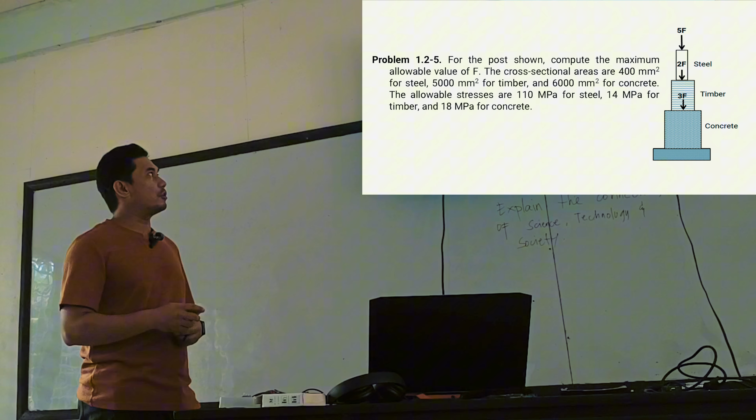For the post shown, compute the maximum allowable value of F. The cross-sectional areas are 400 mm square for steel, 5,000 mm square for timber, and 6,000 mm square for concrete. The allowable stresses are 110 megapascal for steel, 14 MPa for timber, and 18 MPa for concrete.

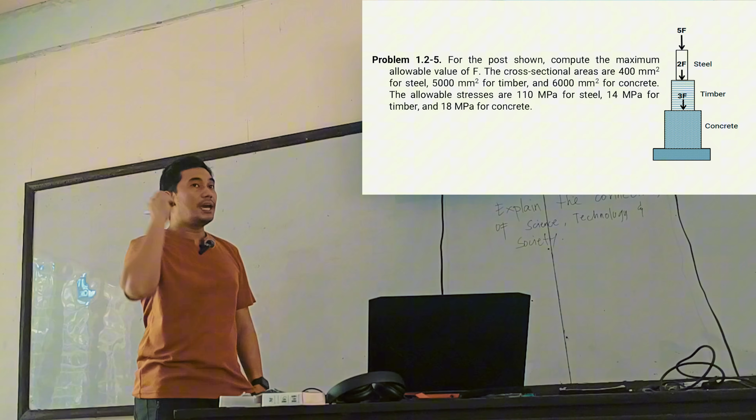We are required to get the allowable value of F. This is similar to the example given, but it's vertically loaded. So we have three materials: concrete, steel, and timber. We're going to cut sections, right?

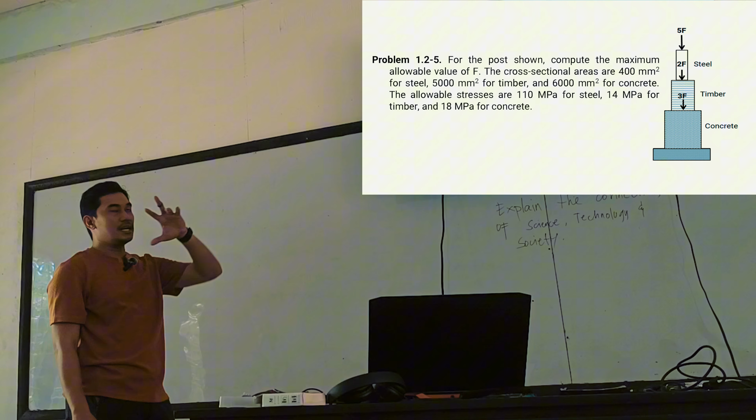That's the technique: the first cutting plane is from the top to the bottom. Even if you analyze the structural loading, the analysis goes from top going down. You don't analyze from bottom going up. It starts from the top and the load accumulates going down.

The first cutting is at the steel side. If this is the cut, this is the steel. So there's a loading on steel: compression of 5F. Therefore we have a reaction at the steel side that is unknown. We need to sum up forces along Y.

Make sure it's Y, not X. Summation equals zero: upward equals downward. So what is upward? The reaction at the steel side equals the downward force, which is 5F. The stress of the steel equals the force applied at the steel side divided by the area of the steel side.

Simple, right? So the stress of the steel is given: 110 megapascal. So 110 equals the force applied at the steel side, that is 5F, divided by the cross-sectional area, 400 mm squared. It's automatically area, not diameter. The answer is clear, right? And that is 8,800 newtons.

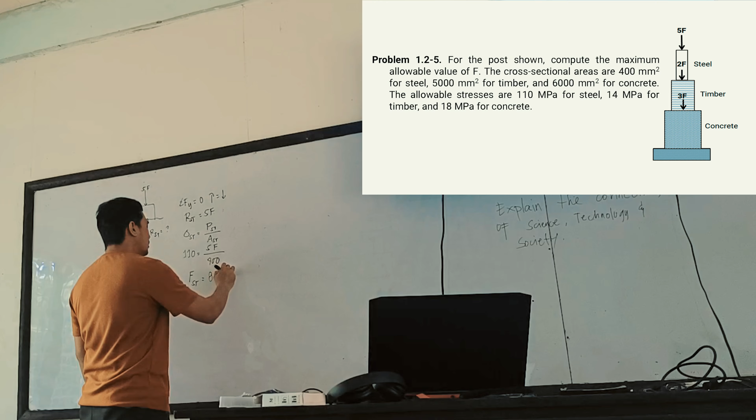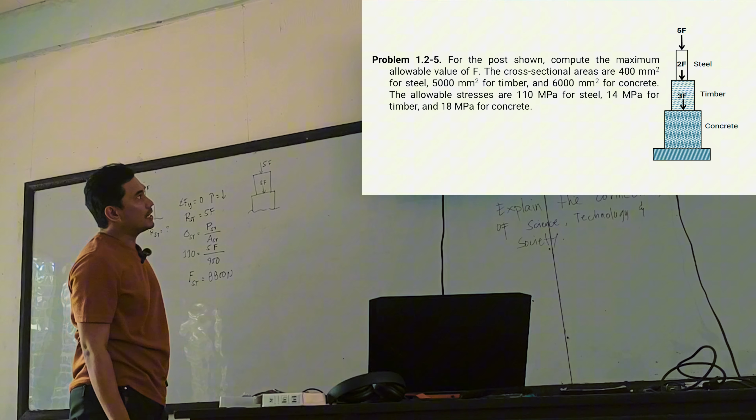This is not yet the final answer because we'll be checking this based on the capacity of timber and concrete too. Now at the second cutting plane, this is now the timber. The steel is loaded with compression of 5F and timber is loaded with compression of 2F at the timber side.

So therefore we have a reaction at the timber side that we don't know. Again, to solve for that, summation of forces vertical equals zero, upward equals downward. What is upward? The reaction at the timber side equals the downward forces, 2F plus 5F. The reaction at the timber side equals 7F.

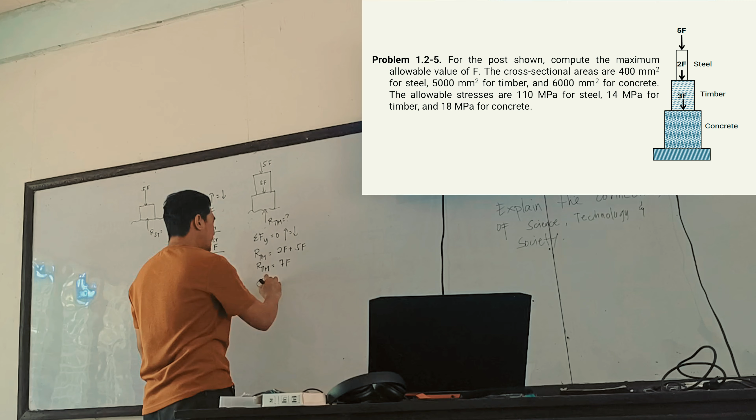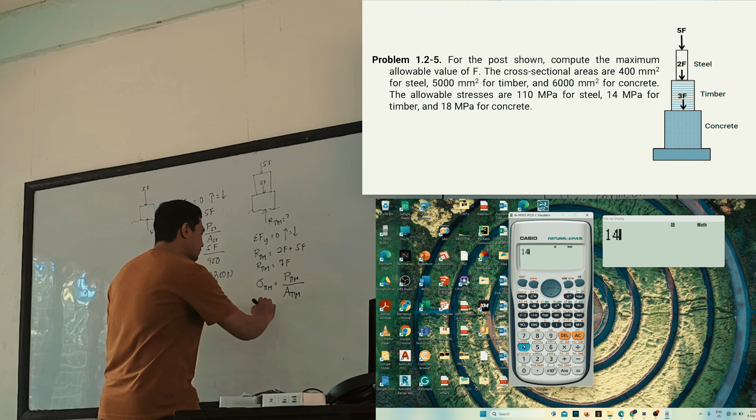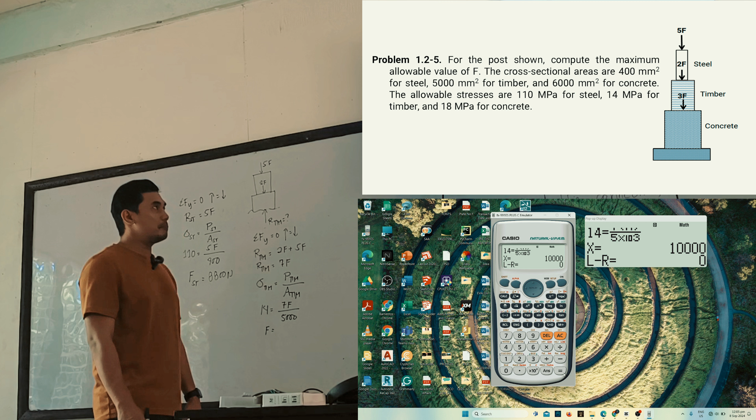So stress at the timber side equals the force applied at the timber divided by the area of the timber. The stress of timber given is 14 MPa. So 14 megapascals equals 7F divided by the area of timber, 5,000 mm squared. So the F value of timber based on its capacity is 10,000 newtons.

The third cutting plane includes concrete, timber, and steel. We have 5F for steel, 2F for timber, and 3F for concrete. And then we have the reaction at the concrete side that we don't know yet.

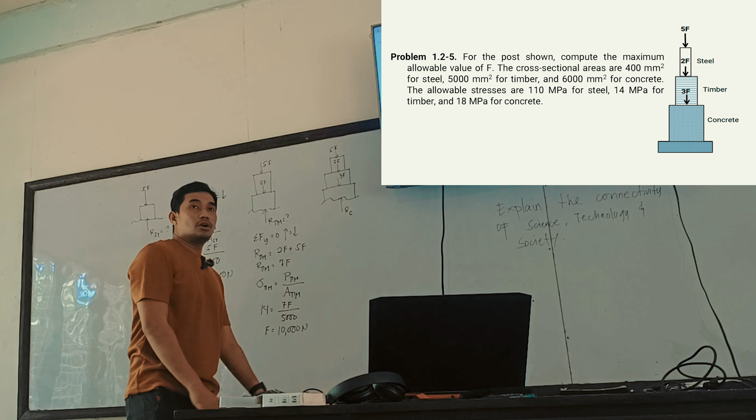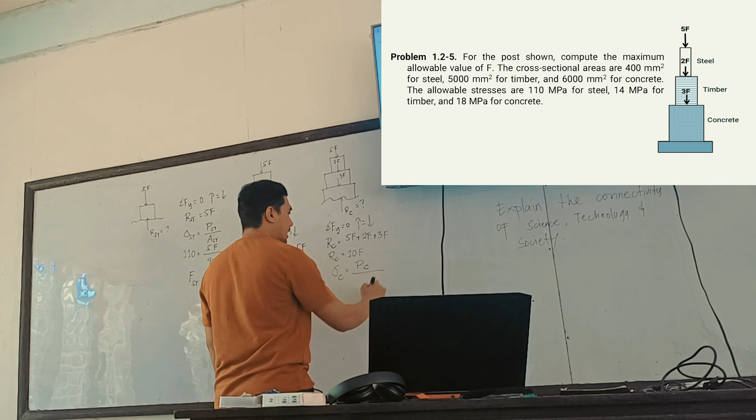To solve for this, again summation of forces vertical equals zero, upward equals downward. Therefore the reaction at the concrete side equals 5F plus 2F plus 3F, which is 10F. The stress for concrete equals the force applied at the concrete side divided by the area of concrete: 18 megapascals equals 10F divided by 6,000 mm squared. F equals 10,800 newtons.

The question asks: what is the maximum capacity allowable of F that can be carried by the three materials? So to solve that, we compute using the formula.

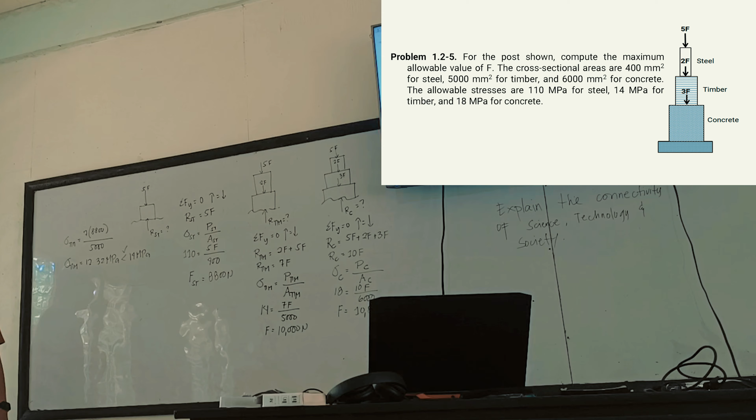Therefore it's okay, it checks out. Next, let's go to the capacity of concrete. The capacity of concrete is 10 times the value of F. So that's 10 times 8,800 divided by the area of 6,000.

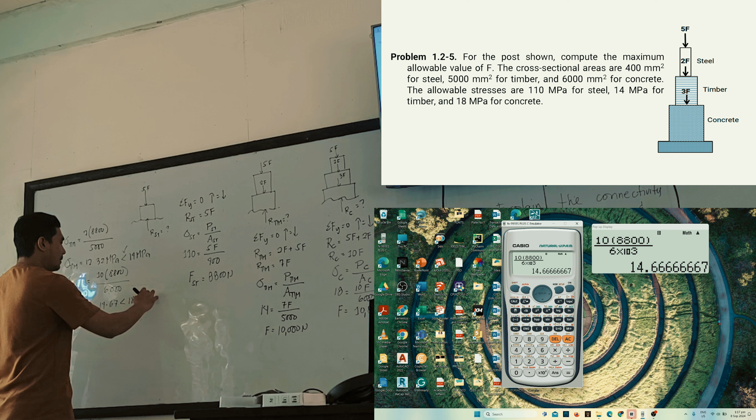Now what's the stress of concrete? 14.67, which is still smaller than its capacity of 18 megapascals. So therefore, correct, it checks out again.

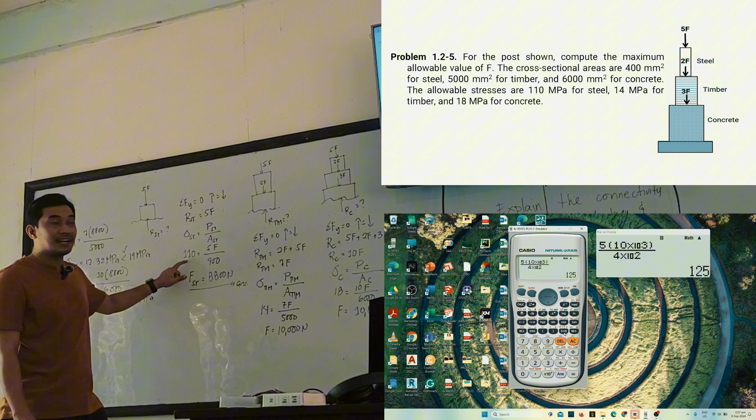Let's try to check this: 5 times 10,000 divided by 400, what's the value? 125, which is greater than 110. It fails. Don't forget that.

How about this one? 10 times 10,000 divided by 6,000. What's the value? 16? Okay, that works for concrete. But it's not enough for steel.

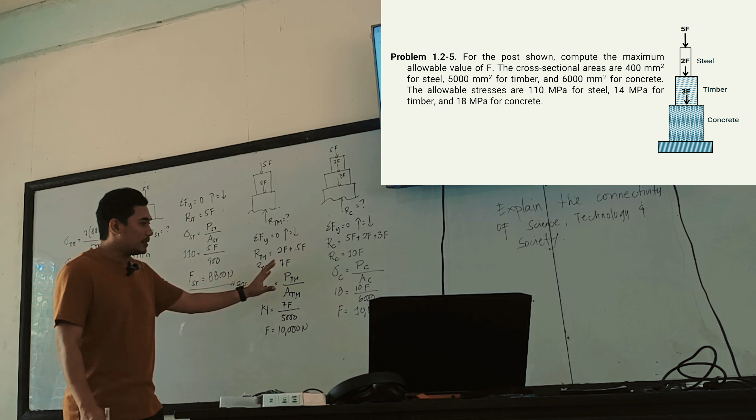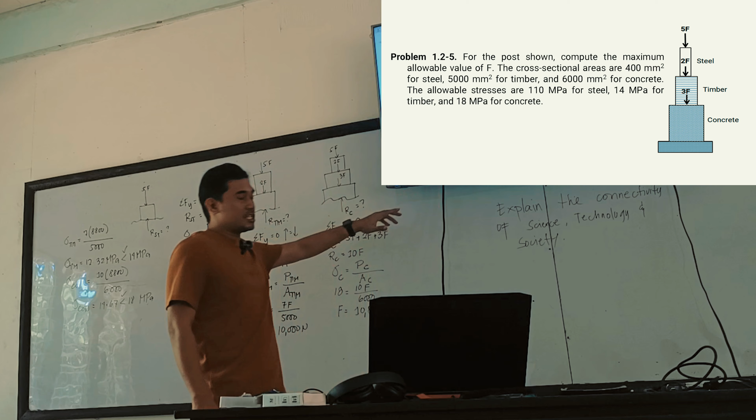By the way, even if you show work for all three, if you don't give a final answer, it's still wrong. Because the question asks for the allowable value of F. If this were a board exam, the value of this question is still just one point - even though you solve a lot for the problem, it's still worth just one point on the board exam.